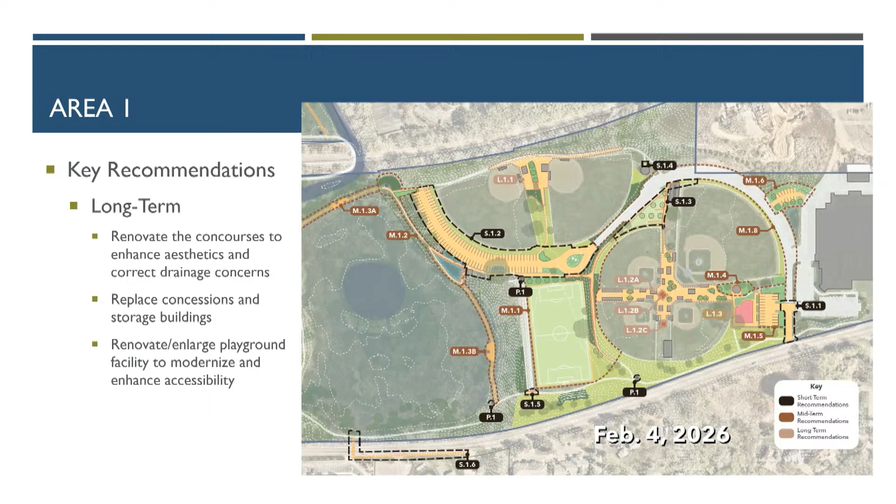Why don't you go to area two? So north of the tracks. I think for some visitors, maybe don't even know it's there, if they're coming only off Minnetonka Boulevard.

This is really about formalizing, improving upon what's there already. We're not proposing any major program changes or new uses, but short-term improving, formalizing some of the off-street parking. There's a handful of stalls off a residential street up at the northwest corner. Improving the entry signage, restroom, expanded parking.

Enhancing the wayfinding signage throughout the whole park. We look at that in every place because it is such a comprehensive network of trails, and people need to know how to navigate who aren't familiar. That particular recommendation comes up as short-term for all these areas. It's general park-wide.

Midterm, this is an interesting one. Some of you may be aware that there is a primary trail that does run under the railroad bridge along the creek, and that's the only connection to the south part of the park. But in flood conditions, that's under a foot of water, pretty typically. So one idea was just to create a loop for folks with another boardwalk extension along the creek there through the wetland. Creates another new feature to attract people as part of the park. They don't have to come to a dead end and turn around. Changes that experience a little bit. So it basically extends the use of this during that flood condition in some ways.

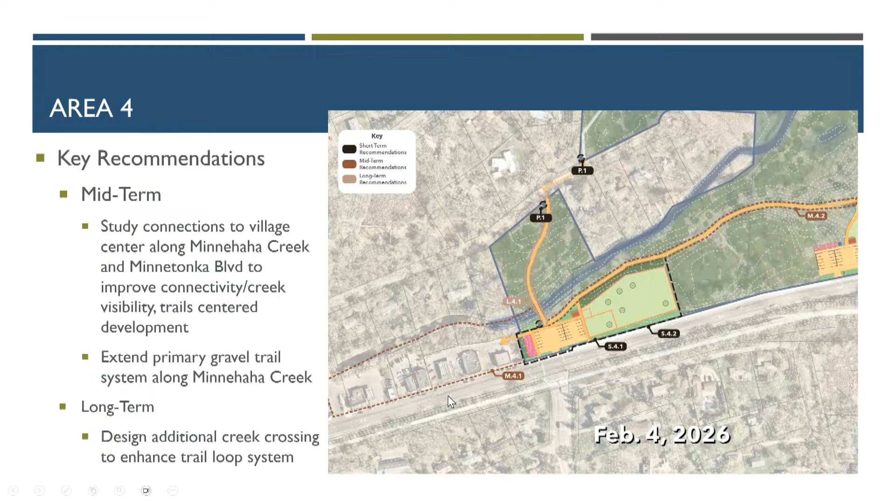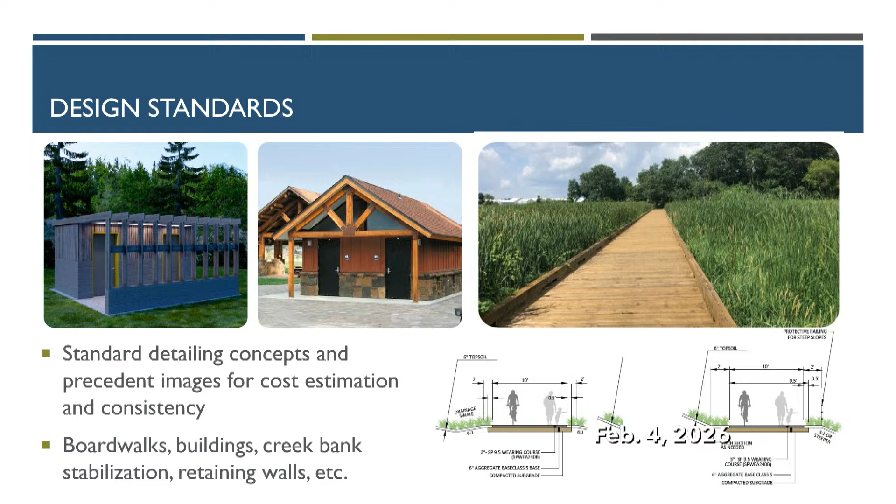Okay, a little bit — I touched on this briefly — design standards. So there are some images in the document to get at some of the architectural concepts that we think would make sense if we were to move ahead with park shelters, some ideas for the boardwalk. There's a lot of detailing in there that showcases how we like to install trails for stability, for clearance, for maintenance, those sorts of things. A lot of that is almost cut and paste from our previous master plans at this point, but really we like to have it as part of a living document moving forward. Those help us with the overall cost estimation, so the final items that get included in this plan can have a dialed-in cost a little bit more.

You'll see in the second half of the document there's a recommendations matrix. So this is more about implementation. You'll see a variety of columns describing each element. That number code system on the far left relates back to the figures — they have sort of a coding system so you can find it. This is very high-level draft at this point. Based on feedback we're getting from you folks, these could be removed entirely.

And then we have to consider the prioritization — where does it make sense? Are these big dreaming ideas down the line, or are these things we feel need improvement closer to the present than out into the distant future? And then we like to highlight the associated guiding principles for each one of these elements to sort of give them weight. So overall, next steps.

This is just the draft master plan. This has been published on Minnetonka Matters for feedback, and we're already receiving feedback — I'm getting plenty of calls. All the comments will be compiled for review as part of the evolution of this document. The final master plan would be updated based on your feedback tonight. It'll be finalized later this spring and presented back to you folks. Then, depending on your recommendation, it would eventually go to City Council for adoption in the summer or so of this year. So with that, we're ready to take some questions and hear some feedback.

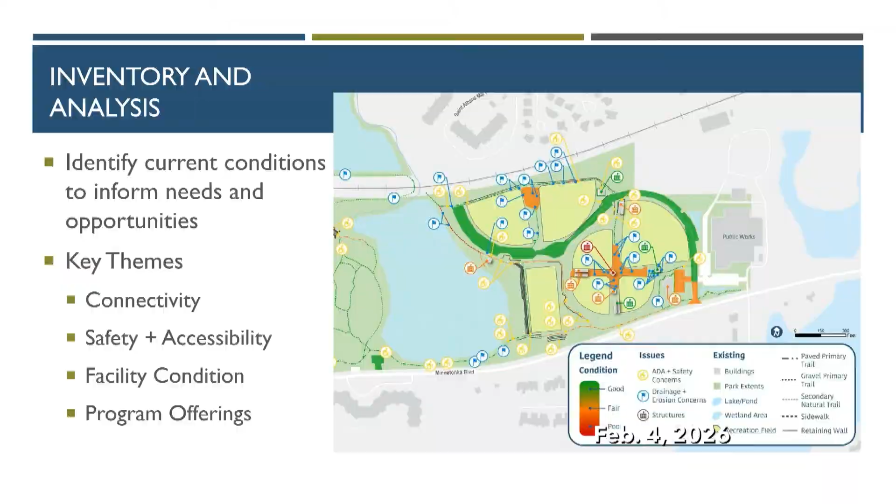This is a broader question having to do with the boardwalks, relevant not only to Area 1 but throughout. What are the environmental concerns you have to look at when building a boardwalk, in terms of water quality, degradation of the existing wetland, and habitat destruction? What's the trade-off between that and the actual boardwalk?

Sure, great question. Our city ordinance does allow for boardwalks to be constructed in wetlands. It's not considered a really significant impact. Most of these wetlands are primarily cattails or reed canary grass, which are, frankly, invasive species, so from a species perspective it's not that big of an impact.

Not the cattails? Well, cattails are invasive — there's a native one and a non-native one, and most of our cattails are considered invasive. As long as you're maintaining the flow of the water, which usually happens because these boardwalks are elevated, it's not that big of an issue.

You're shading out some of the vegetation underneath, but to be honest, it would be much more impactful if the trail were actually on the wetland rather than above it. You still get some growth underneath, and you're not impeding water flow, which is the most important thing when it comes to wetlands. Frankly, we often feel getting people out to experience the wetlands outweighs any of the small impacts you'd see from it.

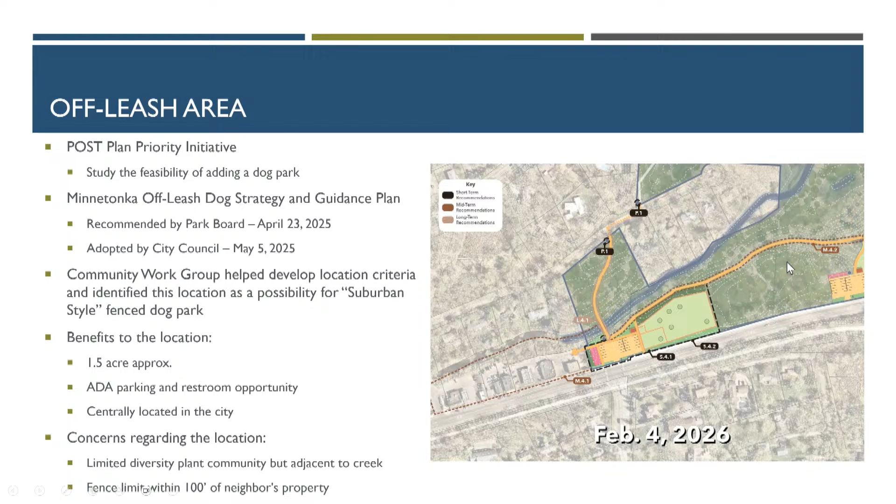Any other questions or comments on Area 4? It kind of moves from Area 4 to the feasibility question: if we didn't go with the picnic areas, is there enough space or topography for potentially moving the dog park into that area?

We had considered that as well. We would need parking if we were going to do a formal off-leash dog area through that section. There's more topography there, and ecologically there are a lot of white and bur oaks in that area, which are apex species, so disturbing underneath them is tough. That area would also be larger - we can look into it per park board direction.

So what area are you talking about? If you could scroll back to Area 3 - that area.

So how much active restoration has been done there? Well, we've done quite a bit of buckthorn mowing in both east and west directions, and along this trail here there's been significant volunteer effort over the years.

In terms of our goal for Oak Savannah, this lawn through here could be easily sprayed out and restored into prairie grasses and Oak Savannah habitat, fit amongst these potential shelters.

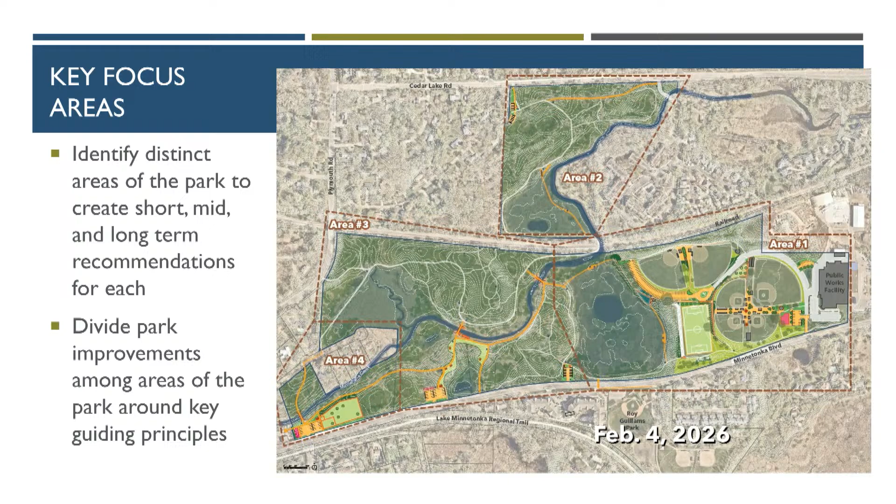Just to clarify, can you go to Area 1? Sure. Are you talking about this little piece there? Yeah, I think you're talking about that for the dog park, that green area on the north side. And then you've got that stretch of parking lot right there, a little bit further. Yeah, that's kind of where the vehicles like to hang out. Okay, and so I was just walking all the way down to get to the gazebo, dead end. And so anyway, that would address that.

Also on this diagram, I love the proposal for having some type of metered crossing that you see at Gilliam Park. Yes, that area there. Love that, because I can tell you, kids, bikes, walkers, that would be beneficial.

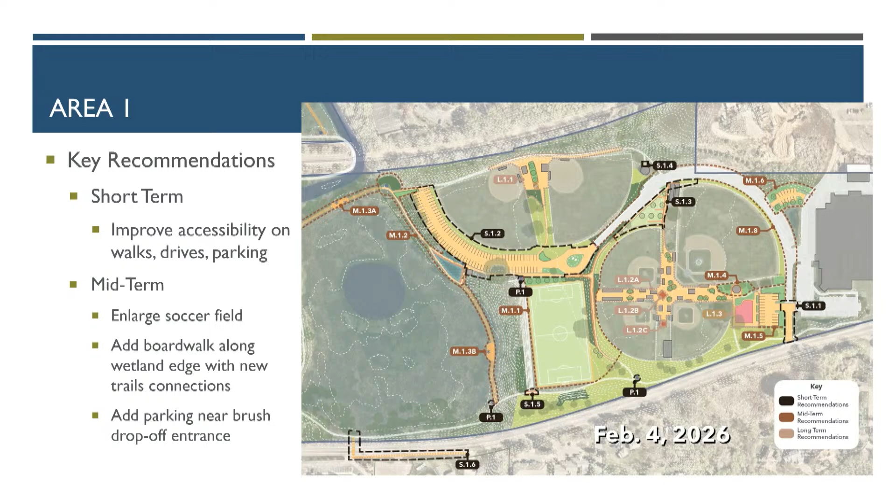Area 2, not a lot of comment on that at all. What I see in this is, other than the boardwalk areas where there's the brighter yellow, you're enhancing paths or walk areas that are already existing. So to me, it's reinforcing those. So even though there's that great big one up by Cedar Lake Road, I agree that would help shore that up, because it's just a dirt path.

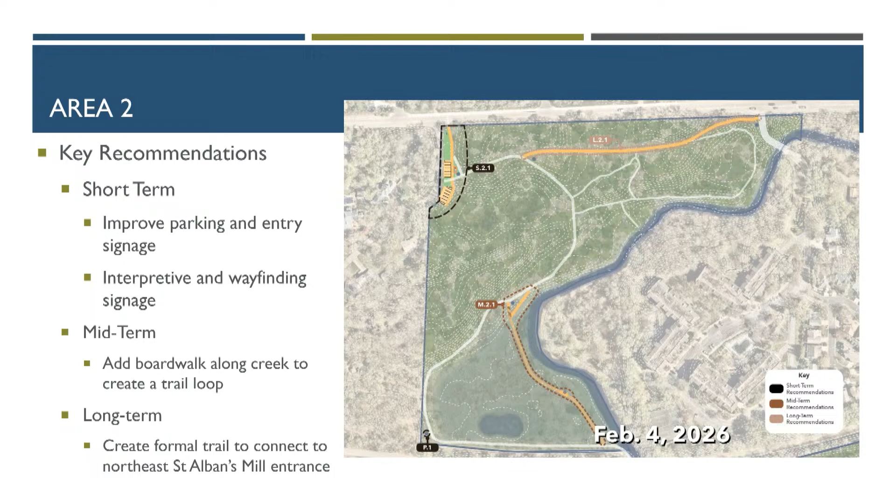And then moving into number 3, that's a complicated one, and I think it's because you talk about the bundled plan, that big parking lot, and then the shelters, the bridge over there. I'm wondering if it's more beneficial to take the bundle, pull it out, hold on that. It's going to be a big bundle dollar-wise, too. Work on the other aspects.

The thing that I see in this is, again, the paths. If there isn't a path there, people will make it. I mean, they're going to find a way to get from A to B and to Z. So I still see, if you continue on further development, they're going to be doing that east-west, kind of southwest.

They're going to be walking through there. It's a new area for them to explore. People were talking about the hillside and the rolling topography. The hammocker people like to be out there, and people are out there picnicking and having a good time. So supporting more of the activities already naturally happening out there, and having some nice access points out there.

There was a mention of the small parking lot in the southeast. Yes, I generally see over there people parking, dog walking, heading into the park. Really not much transfer of people getting over to the soccer area, I don't see that as much of an overflow area. That's really for the park itself. And I would say, regardless, if you build that big parking lot there, I still believe they're going to be parallel parking along Minnetonka Boulevard, since that's the shortest distance to the path area where they want to walk. So you can only do what you can do.

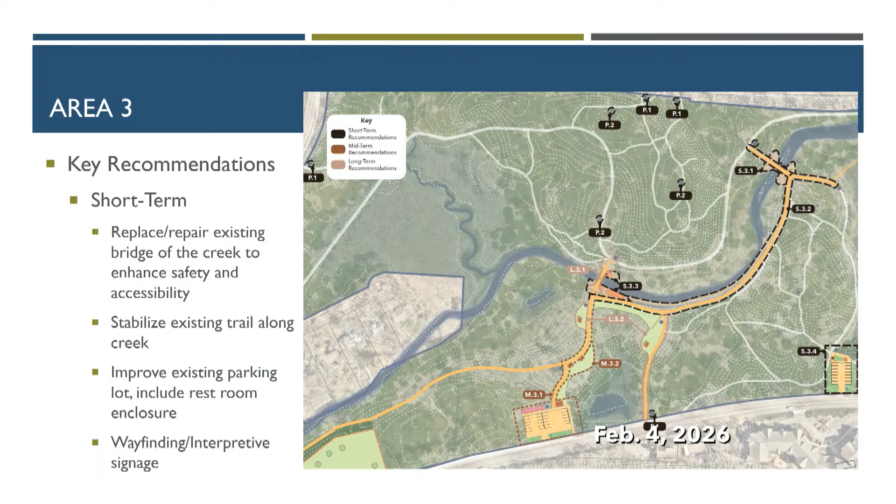Then Area 4 — I have mixed feelings again, for the various reasons already spoken about, the leashed, off-leash dog area that's fenced. I understand what people are saying about proximity to the houses and to Minnetonka Boulevard. I kind of look at this as, I know the city is looking for a location for this, but Big Willow may just not be suited for it for a variety of reasons. So that may be something to consider — finding a better location, as some other possible areas were mentioned.

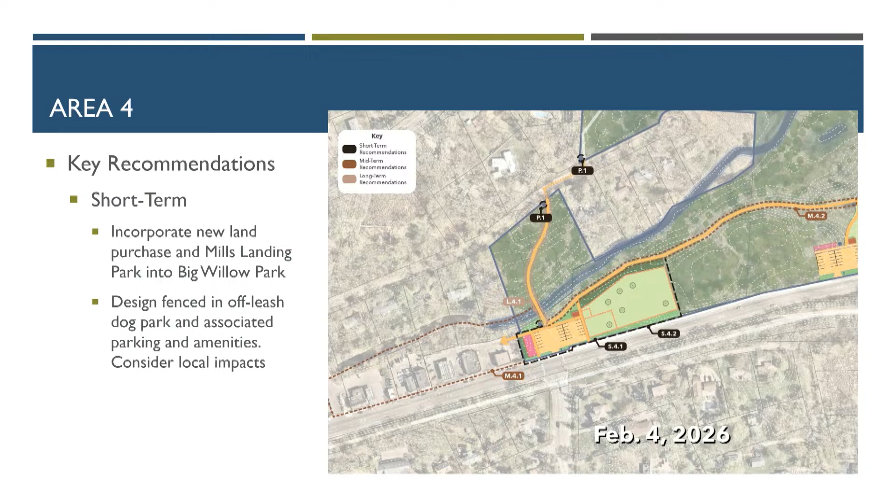The last comment I'll make has to do with the demolition of the building. What I've appreciated in the park is a little bit of history — there's a remnant from every household that's been there. And so I'm anxious to see what the remnant will be from that most recently purchased parcel. Thank you.

Thank you. Thank you for coming. And thanks for your volunteer work in the park. You and your group do a great job. Thank you.

Any more comments, questions? Yeah.

Sorry, I came mostly to maybe just hear the Cullen presentation, but I'm Joe Van Sloan, a resident of Minnetonka. I'm also the former chair of the History Commission of Minnetonka, which existed and doesn't at this point. I just want to put in a push for the possibility of more historical interpretive signs in the park — I think that would be a fantastic idea. Our commission brought forward a plan for several signs around the city. It had budgeting, and then it kind of disappeared. So if that opportunity is there with the funds, I think that would be a great additional opportunity to show the community's history and inform newer residents what the history of this community is. I think that would be fantastic. So thank you.

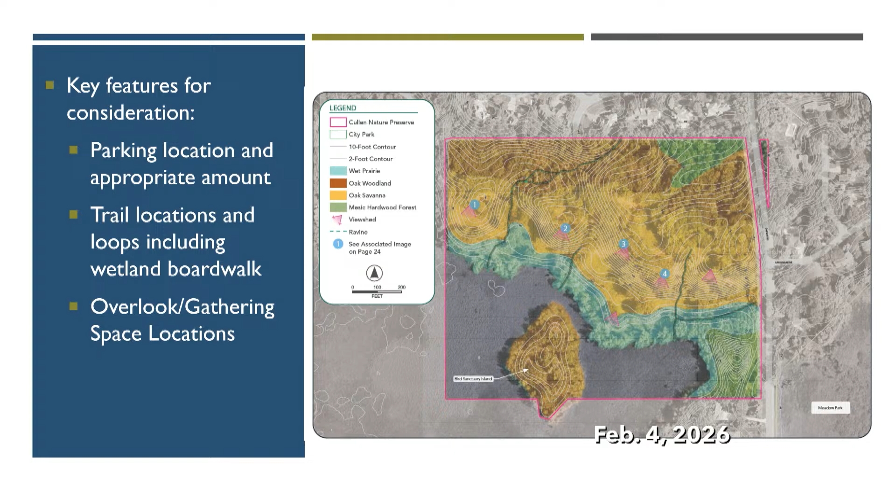Some of the key considerations we had to look at closely in this process: the parking location and the right amount of parking, and how could we accomplish trails that would fit into the landscape, not add to erosion issues, and generally provide loops that highlight the overview of the wetland and some of the really beautiful substantial view sheds through that area. So where do we site those throughout the park? You'll see that represented in a number of figures and images in the master plan.

For the parking, we're proposing moving the parking to Oakland Road. There was some conversation at the last park board meeting about what the right amount of parking is. We're building this. We want it modestly sized, but we certainly want to be able to get buses in, with the consideration that we might get more traffic than we expected.

We want to make sure there's available parking. At this point, I want to reiterate this is a master plan concept, and out of this process there would be a more thorough design that would look into the real footprint of this parking and the appropriate amount of stalls. We feel strongly that this is the appropriate amount for the needs. There is overflow parking in Meadow to the south, but it is a bit of a walk. Again, if we were budgeted to design this, there would be further considerations about the amount of stalls.

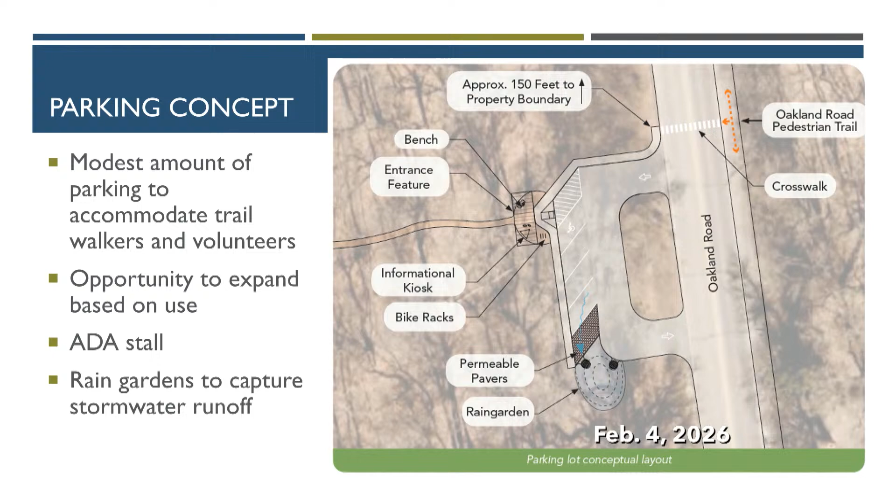Yes, of course, later. Do you want to go through? Let's finish. Yeah, getting there.

There are precedent images in the document that highlight the type of architecture: simple lines, modern, timeless aesthetic, with appropriate materials, using the right metals and woods that fit into the landscape and don't become objects out on the landscape. We want a threshold feature near the parking where you get the sense that you're leaving your car behind and entering this nature-focused place, using architectural and artistic features to create that vibe as you enter into the park.

In the document, you'll find a trails concept. We had heard previously some concern about some of these trails being close to property boundaries. Keep in mind that as a master plan process, a lot of on-site consideration of where these trails will go needs to take place in the field. So there are lines on this figure now, but there's a lot that would happen in terms of determining the exact location.

We certainly wouldn't want trails to be able to see nearby houses, so we would fit those into the landscape appropriately. What we'd like to do is create loops that move up and down these slopes in a way that doesn't damage them, trying to fit in the grade of these natural paths thoughtfully. We also want to get to significant secondary gathering places that folks will want to stop at and look out on the landscape, where we could include some simple park amenities like benches.

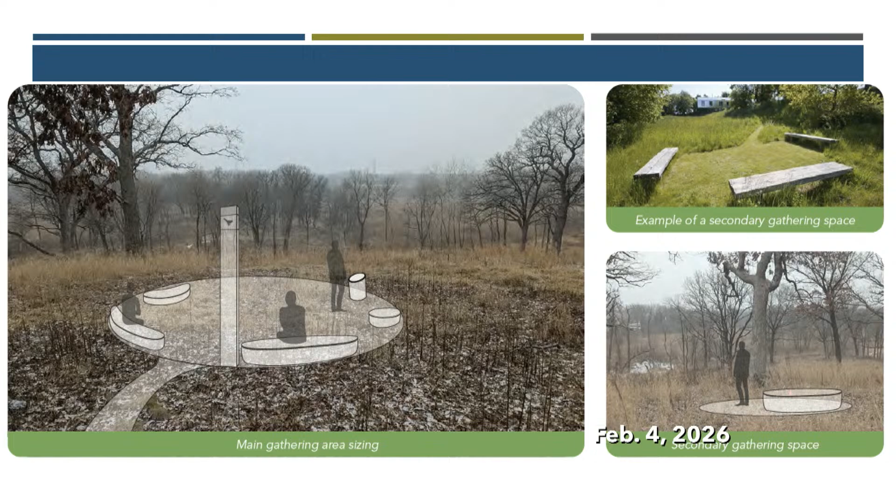We are proposing a boardwalk, two segments, down along the wetland edge. We could use this as an opportunity to do significant wetland plant community restoration on the inside of the boardwalk, knowing that we can isolate it from the invasive Phragmites, cattails, and reed canary grass. We could showcase wetland plant community restoration along this boardwalk in a controlled environment, where we're already doing a ton of upland restoration. So this is an opportunity to focus on wetland restoration, which is something we don't get to do very much.

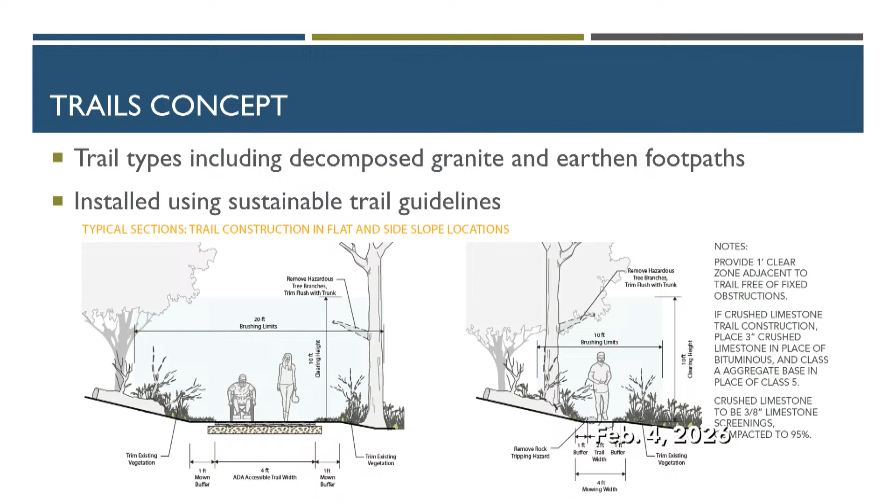We do have detailing and standards in the document, again highlighting how we would construct some of these trails to reduce erosion and keep the character of the space in mind. These earthen style paths have a relatively small footprint, but they would have to be benched into the slopes appropriately and sited so that they conform with the landscape and don't add to erosion or increase foot traffic over time.

We want this document to serve as a mission to champion the conservation values. We're going to do that through thoughtful interpretation of the on-site features, specifically around the history of Ann Cullen Smith donating this parcel and her legacy in the city, as well as the restoration work, the volunteerism, and the means and methods of restoration on site. Really the goal here would be to establish Cullen as a nature preserve and define that as passive uses that don't impact the ecology.

At the last meeting, you folks talked quite a bit about this additional consideration of potentially changing park ordinance to limit the use of the site, specifically around only allowing service dogs in the park. So I'd like some additional feedback tonight on that particular conversation.

The current funding situation is that, unfortunately, we applied for but were denied a Legislative Citizen Commission on Minnesota Resources grant early last year. That was a big ask to implement all the elements of this master plan, and we were turned down. But we do have capital improvement plan efforts coming up, and that budget may be included as per council direction. We will include that as an ask in the capital improvement plan, but the council will discuss and apply budgets appropriately. And then we're exploring future grant opportunities moving forward.

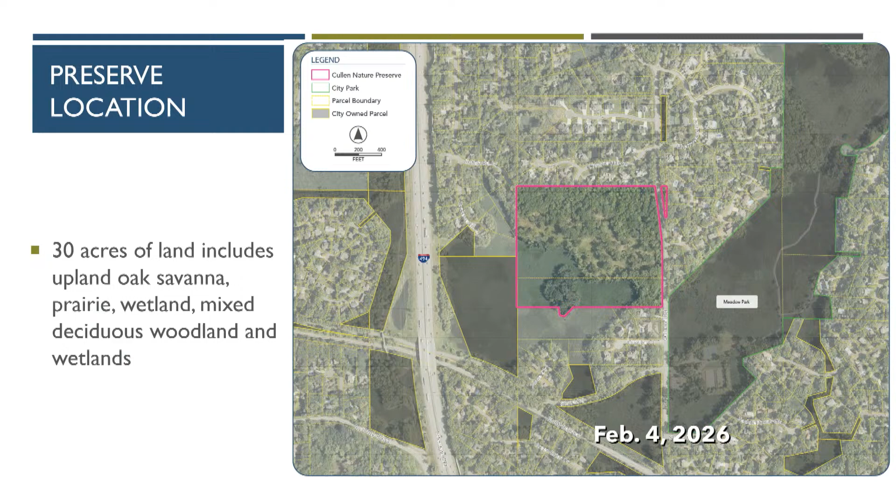The second thing was I had asked about expanding the accessibility trail. It looks like it's the exact same size. So what was the, why is that? What are the issues?

The issues are creating accessible slopes and the amount of engineering and siting of those particular trails through that area. At this master plan level, it's really hard to say we could get ADA trails in here. We would need to look really closely at it. So I did add language stating that we would look very closely during trail design at where accessible trails could be implemented beyond the one we show, as intentionality for the future.

That we would try to get as much of that in, balancing the impacts to the plant communities out there as much as we possibly could. And even if it's not a loop, even if we can extend an accessibility trail to an out and back, a communal space, a roundabout, I guess I'd call it, then all the better in my opinion. For instance, this particular node here, how this slope works, would there be a chance to get an ADA trail through here?

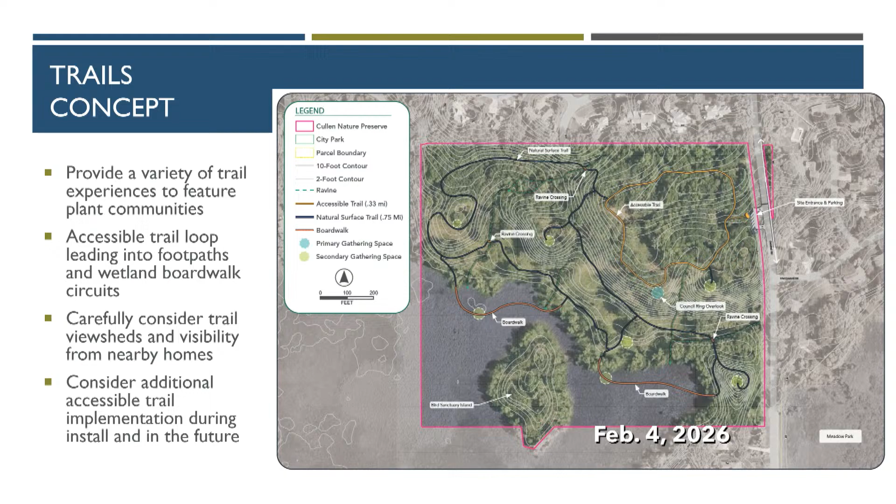That would be an option. And especially because I was able to walk this with the friends, I'm going to say the north natural surface trail, that's how we walked back, and it was pretty flat coming back across the top of the park. Sure, so again, that may be a place where an out and back is accessible. Yep, absolutely.

Well, I've got a couple comments. First question, so the neighbors on the north side are concerned, you're going to be taking into account, from what I gathered, as you do your actual siting. Absolutely, visibility, okay. I don't think anybody wants to walk on a nature trail that sees a residential backyard. The whole intention here is that those are significantly separated.

We've heard the concern about that trail being too close to the property boundary, and I mean it when I say we don't want to be able to see houses. And by the benefit, those people wouldn't be able to see anybody in the parks, ideally.

The second thing is, I would concur with Katie about being nervous about the parking lot size. Sure. Don't want it so big that it looks empty or takes up space, but on the other hand, don't want it so small that it's, so I would really look hard at that because it feels tight to me.

We had talked about different types of paving, like a traditional asphalt lot with an ADA stall, and then a gravel overflow portion where additional parking could stack up, but we don't need to plow it or maintain asphalt, for instance. So there's sort of an overflow option.

And then maybe an oddball question, memorial benches. They're pretty popular in various parks. I don't see any reference here. Has there been thought about that? I have a perspective on that, but has there been thought about that? And I'd have to refer to the document, but I think there was some talk amongst us during this process that if there was to be any memorialization, it could happen at this entry feature, potentially.

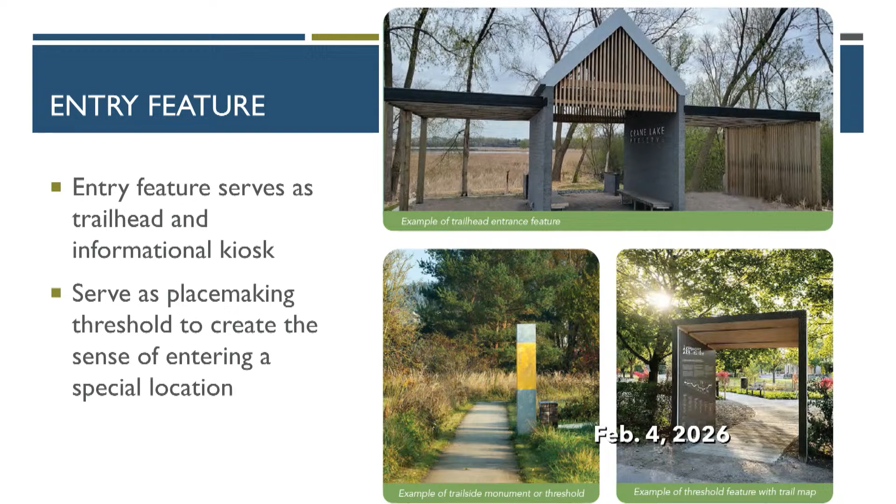I'd also be supportive of that additional language regarding restriction of dogs, since that's a conflict of interest with wildlife and birds, and Audubon Society is another potential source for what you brought up. But as far as the parking, I'm going to respectfully disagree, because I like the limited parking, as I think increased parking would be detrimental. Yeah, it's a balancing act. Yeah, it'd be detrimental to the intent, which is reflective observation, not crowds. So I just wanted to voice that alternative opinion.

I'm in favor of no dogs, and I'm in favor of the existing small parking amount, with some signage that says we invite you to park down at Meadow and get your extra steps in.

And the third thing is, I know the concept is to do it all at once. I would suggest that if there's not enough money to do it all, we save the boardwalk section of trail and the little trails that go down to it for later, rather than delay everything, if that was an option.

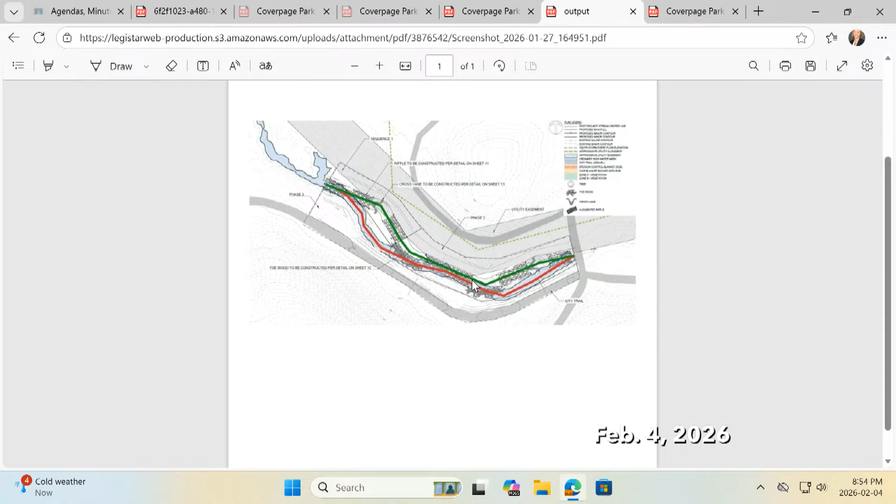Plans to do anything with the rest of the tree? Haul it to our brush yard is the plan now. But why, do you want some mulch?

There's some value to having just down trees. I understand it can look messy, but part of the plan will be to fully revegetate it with appropriate native plant communities. So there are solutions beyond native seeding.

Live staking, willows can be used for live staking. There's a variety of native willow shrubs, peach leaf, Bebb's willow, and others that can be installed in a way where we get shrub cover for birds along that creek corridor.

So we would sort of reintroduce the willows over time. But yeah, we would treat it like any of the trees we take down in the city, they would come to our brush yard.

Would they be substantially rotten in the middle? I wondered if a big chunk could be put up as a standing snag. We can look into it. I don't know how much that would cost.

The problem with willows is they're soft, generally soft, fast-growing wood, and they do hollow out on the inside. We've lost a lot because they'll be multi-trunked and start to split apart, and once you lose one side, you'll lose the other side. It's a little hard for us to pick and choose logs when we're out there, besides saving the stumps for the bank stabilization.

All right, but it's a good note. We're always looking to create habitat and down material, and rotting logs do just that. There's cavity nesters and all that. So, thanks for the update. Of course.